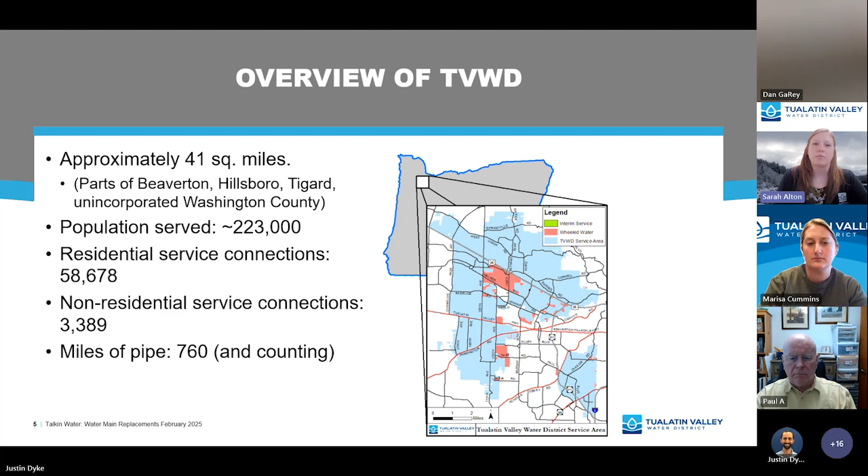One third of the leaks are caused by other factors, which I've mentioned could be something as simple as a contractor hit on our pipe. Another third approximately is a shear break, which I'll explain in just a moment. And another third is a corrosion break. And that's what we're really going to focus on as part of our water mains replacement program. And we'll show you pictures of what those look like in just a couple of slides.

So a shear break is something that happens on our cast iron water mains in our system. These water mains were installed about 1980 and prior. And so they're on our older pipes that are cast iron, and what happens is there's basically a brittle fracture on that pipeline. These are really simple for us to go out and fix, and we can usually return service in about an hour once we've repaired something like that.

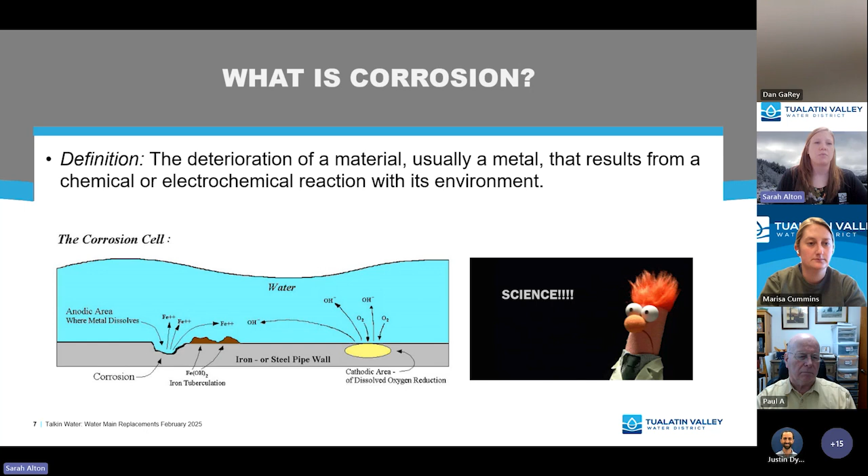And so you can see there's all sorts of science that goes into this. And on the next slide, I'll talk about some of the factors that cause corrosion on our pipelines. So what are some of the factors that influence corrosion? We've got temperature, relative humidity, salt content, acidity, oxygen, steel composition, and soil composition. Some of the things that are really important in the Pacific Northwest where we live are the temperature, the humidity, and the soil composition.

So as you know, we have really cold days, we have really hot days. Those temperature fluctuations all impact the ability of the soil to be corrosive to our pipelines. And then the other big factor is our soil composition. Where we live in the valley here, we have a lot of clay soils, which are very corrosive to our buried water lines.

So you've probably been out gardening or landscaping, and you've had to dig through that tough clay soil. That's what we're talking about when we say the clay soils. And when those touch our water lines, that can cause corrosion. So our engineers look at ways of keeping our pipelines protected from these factors. We look at installing our pipelines with protective coatings, such as plastic polyethylene encasement, or with a cathodic protection system that will help protect them.

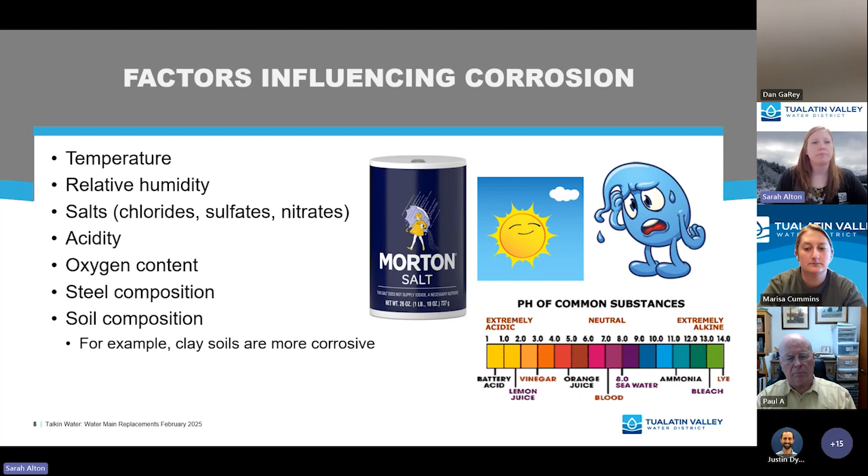So now that you know what we're concerned about, I'll turn it over to Marisa so she can talk about how we actually manage a program to replace these water mains.

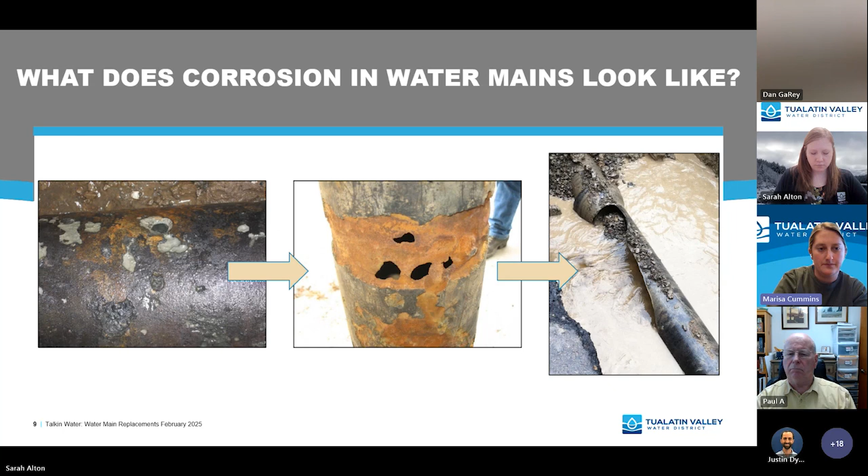So when it comes to replacing water mains, the engineering team at TVWD uses a prioritization tool that was developed by TVWD staff in 2013. We have 14 different criteria that were selected over a series of meetings with staff. We have different point levels assigned to descriptors within the criteria in order to rank these projects to see which ones need to be prioritized over others.

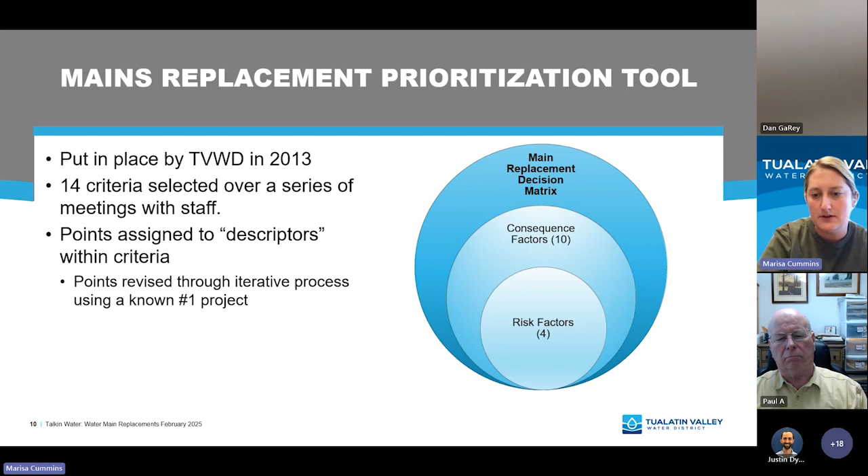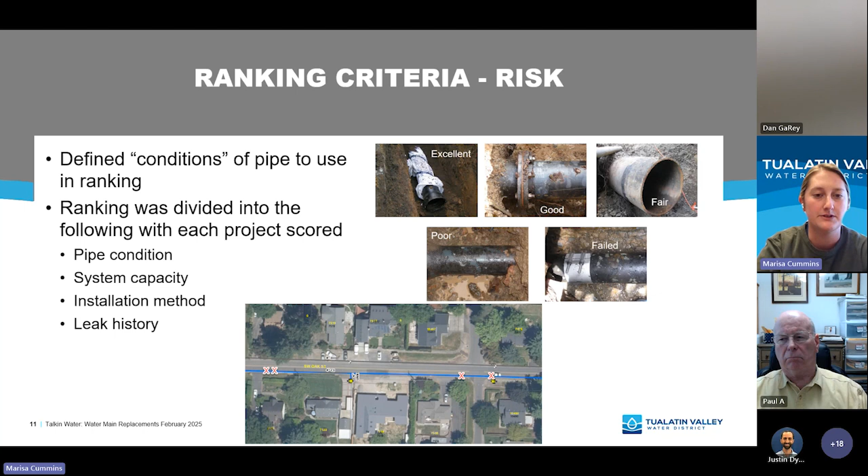And then leak history. So the bottom graphic shows Southwest Oak Street, which is a project that we have coming up later in the spring. And just in this area of pipe, you can see the X's where we've had leaks. So whenever our crews go out to respond to a leak, they assign a GPS coordinate to where that leak actually happens. And then it updates to our mapping system. So our engineering team is in the loop on where the problem areas are.

So ranking criteria also goes into consequence of failure. Rankings are divided into the following with points assigned: critical infrastructure, project coordination, consequence of failure. So critical infrastructure in TVWD's district is reservoirs, pump stations, anything that keeps our system working. If we know that there's an issue with pipes that is near critical infrastructure and it would affect a greater area of people, then that would move it up on our list as far as priority.

Project coordination. So we work with partnering agencies such as Washington County, City of Tigard, City of Beaverton, and try to coordinate with them, especially when they have paving projects, in order to save our customers money on our replacement jobs. So we'll talk about this more later as an example with the City of Tigard coordination project.

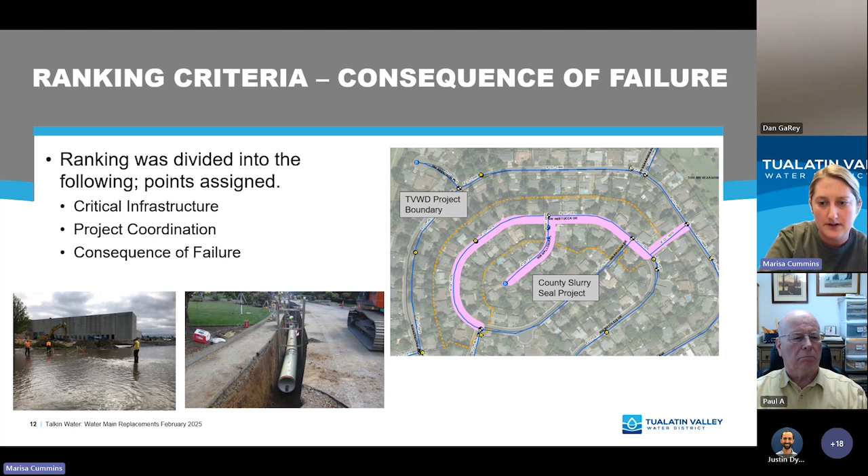So more on consequence of failure. We look at business impacts. That could be daycares, assisted living, schools, restaurants, cost to TVWD, the project as a whole, criticality of water service. And a good example of that is Providence St. Vincent's Hospital. High water use customers such as Intel, Nike, area served, proximity to critical infrastructure, and then traffic impacts.

So traffic impacts are very important just because busy roads equal high traffic, and high traffic is high traffic control cost and more dangerous work environments for our crews. So in an emergency repair situation, we want to make sure our crews are safe, and main breaks on high traffic roads are ranked higher in hopes that we replace known areas of concern ahead of multiple emergency leak repairs.

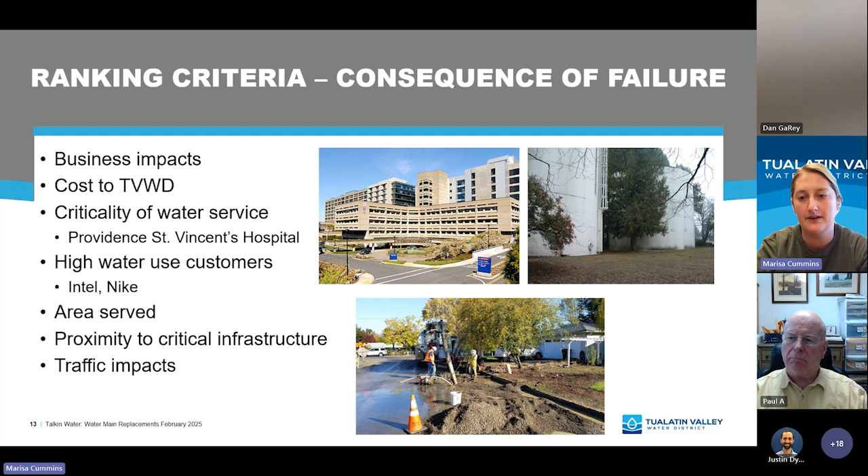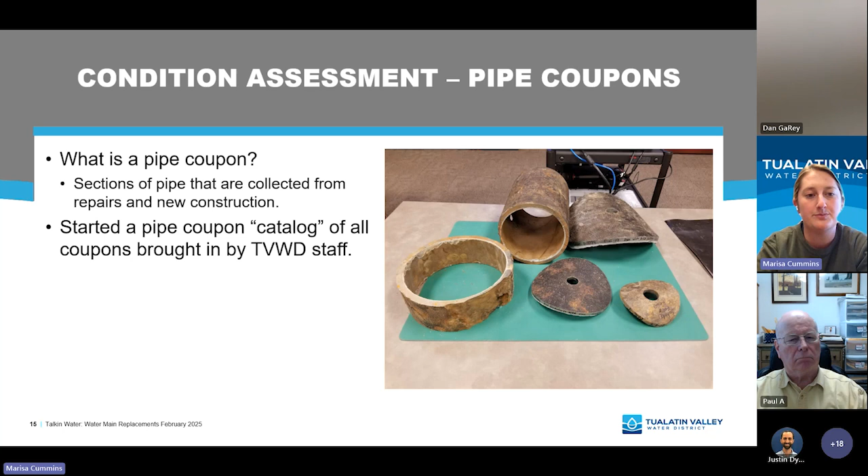So how do we determine project scope? We do condition assessments on our pipes, and there are 2 methods we use: pipe coupons and potholes. So what are pipe coupons? Pipe coupons are sections of pipe that are collected from repairs and new construction. We started a pipe coupon catalog of all coupons brought in by TVWD staff. Each coupon is photographed and condition information is recorded.

We are able to look at pipe condition, the remaining wall thickness, and then the pitting depth. So like Sarah said, we have small pits, that's concerning, but if the pits are larger and larger into the wall of the pipe, we know that it's a matter of time before that pipe will fail. The information from these coupons is stored digitally for future analysis and decision-making regarding the pipe in that area.

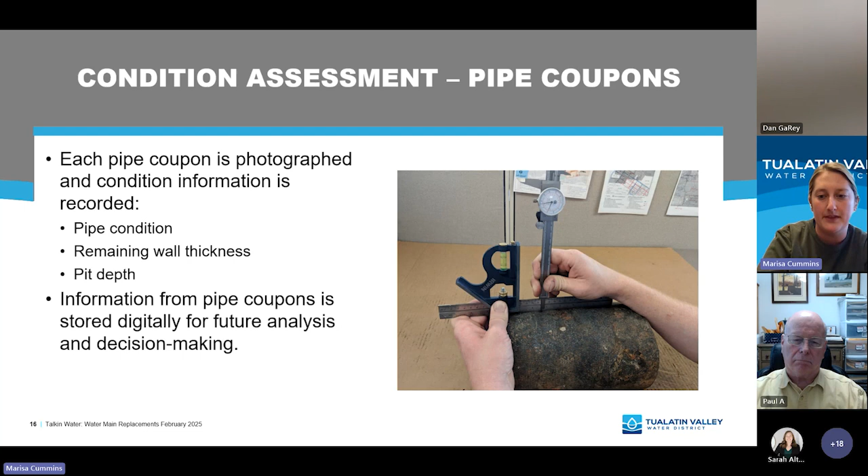We also do potholes. Engineering selects multiple locations on a pipeline to help determine the scope of project. Our operations staff will excavate all around the sides of the pipe at these predetermined locations. The pipe is then cleaned so that an inspection can be made.

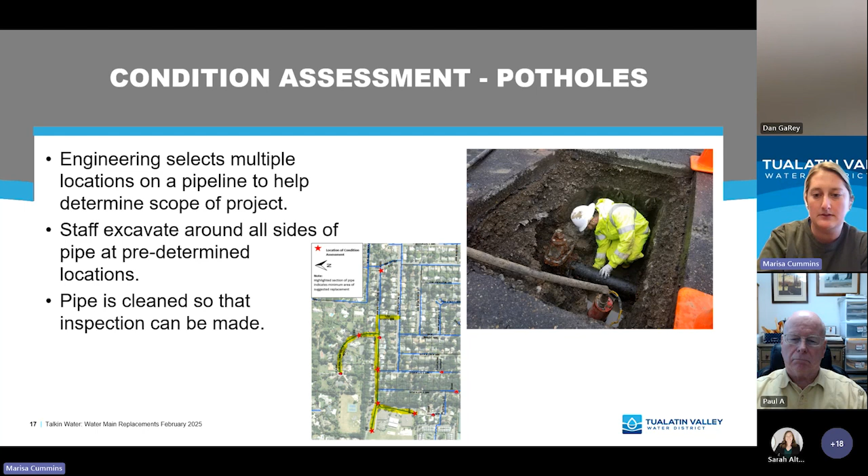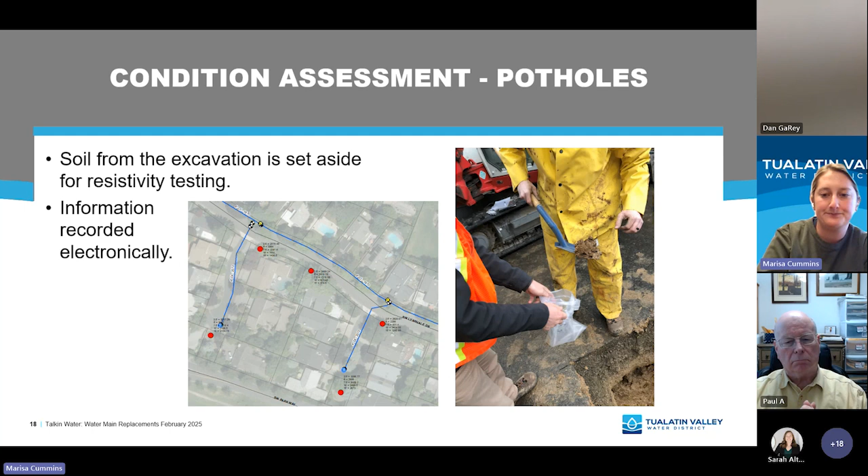Soil from the excavation is set aside for resistivity testing. Information is recorded electronically with GPS points in our mapping systems online. We use a pneumatic needle scaler to remove any outside coating where corrosion is visibly present whenever we are doing potholing. And then we use a pipe pit gauge to measure the depth of visible pits. The depth of the pit can be used to determine the amount of remaining pipe wall.

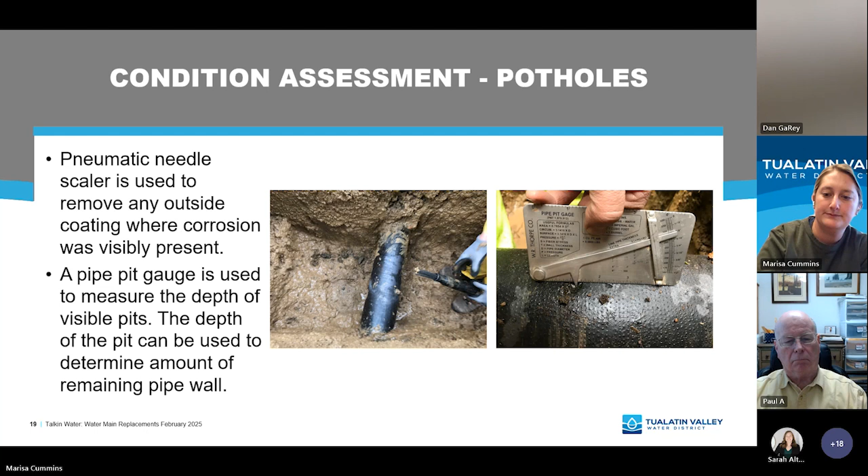Potholing has been proven effective, eliminating over $1 million in projected scope of replacement in the past year alone. It allows TVWD to estimate remaining lifespan of a water main. And I know we did some potholing over the summer on Stoddard Drive and Wooded Way, and we were able to reduce, or I guess postpone, a replacement due to the condition being a lot better than what we expected.

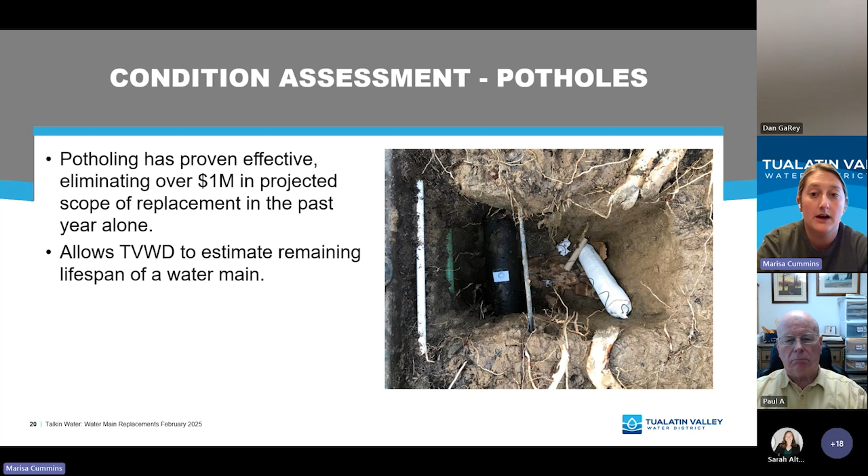So communicating with our customers, we inform customers in advance of water main replacement projects through postcards, text messages, automated calls, and emails. This proactive approach ensures customers are aware of upcoming work, allowing them to prepare for any temporary disruptions. Throughout the project, we provide real-time updates using the same communication channels. Our goal is to ensure that customers are well informed and feel supported throughout the entire process. Effective communication is key to achieving this, as it helps build trust, reduces misunderstandings, and enhances overall satisfaction with our services.

So I wanted to highlight a couple of projects. A recently completed project as part of this program is Southwest 175th Avenue, south of Granada Drive. So previously we had about 400 feet of 4-inch cast iron with 2 leaks recorded. We replaced that with about 400 feet of 8-inch and 4-inch ductile iron pipe. On our prioritization ranking, it was 7th, and the driving factor was very poor pipe condition at the area of the leaks.

Status, we completed construction in January 2025. We will do final restoration of paving this spring. We're waiting for a warmer weather window, which will make the paving last longer. We don't try to do final paving in the wintertime.

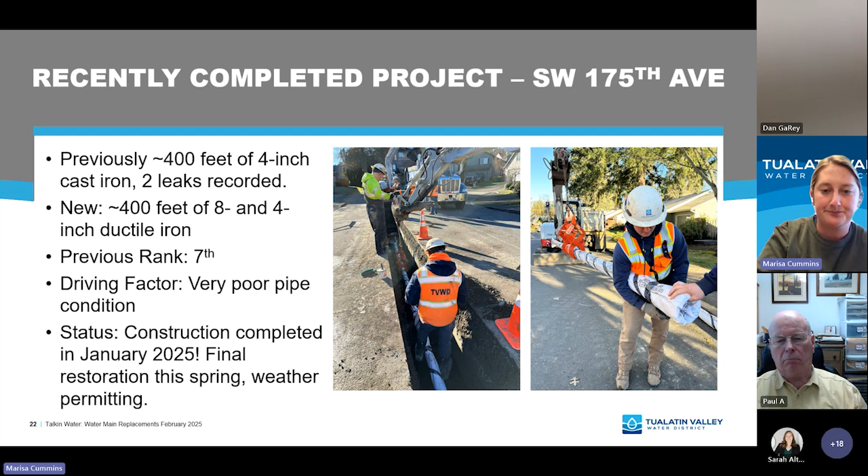So our current project is Southwest 92nd Avenue at Greenburg in the city of Tigard. The existing is a 4-inch cast iron. We had 4 leaks recorded between 2019 and 2022. And then we are installing about 1,000 linear feet of 8-inch ductile iron pipe. The rank on the prioritization tool was 10th, but the driving factor was the City of Tigard paving project.

So the City of Tigard contacted our engineering department and said that they were going to be paving Southwest 92nd Avenue. We looked at our mapping system, we looked at the prioritization tool, and the condition of the pipe needed to be repaired. So we are installing the new pipe ahead of Tigard's paving project. And in this scenario, we don't have to put any final restoration. Tigard is assuming all of that in their cost for their project. So that saves our customers money. We are currently in construction. We are expected to be complete in mid-March, ahead of Tigard starting their project.